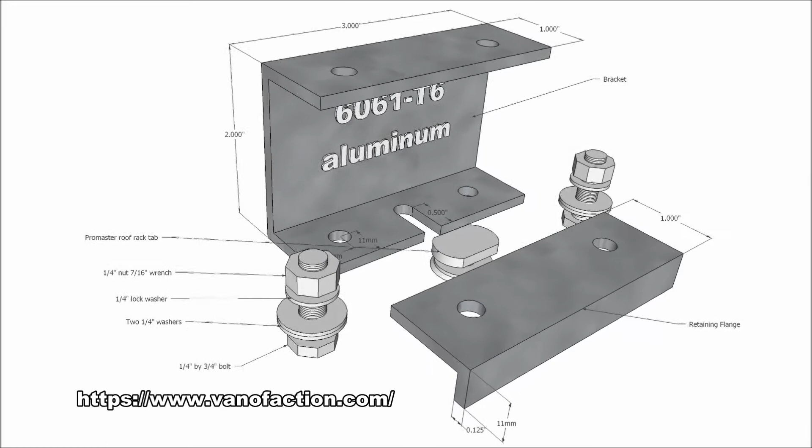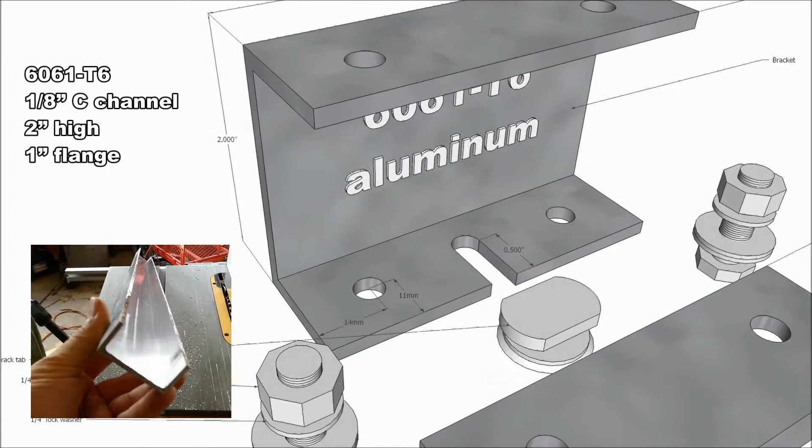Now, for starters, we need to buy some aluminum. The entire bracket can be made from a single piece of 1/8 inch C-channel, 2 inches high with 1-inch flanges. I couldn't get that exact material in Ottawa, so I bought C-channel that was 2 inches high with 2-inch flanges and then cut it to size.

The dimensions of the two finished pieces are shown here, and yes, I used both metric and standard because it seems like I'm kind of weird that way.

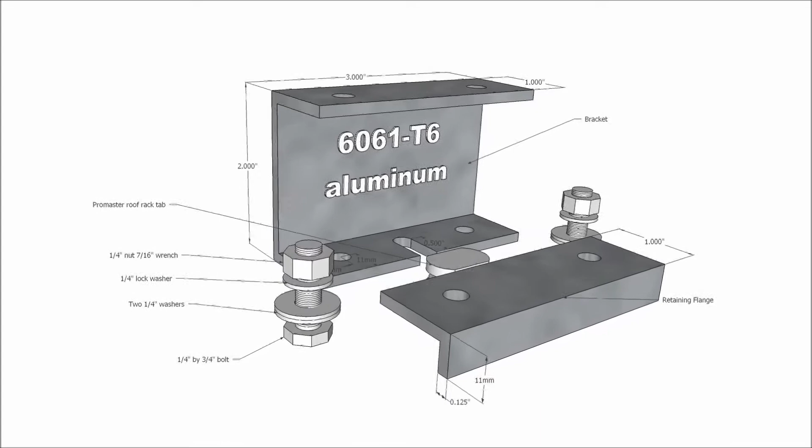Dave's design uses these two pieces to securely clamp onto the Promaster roof rack tabs. This secure method of installation requires no drilling into the roof of your van. With two 3/4 inch long 1/4 inch bolts inserted, the bracket slips under the Promaster roof tab.

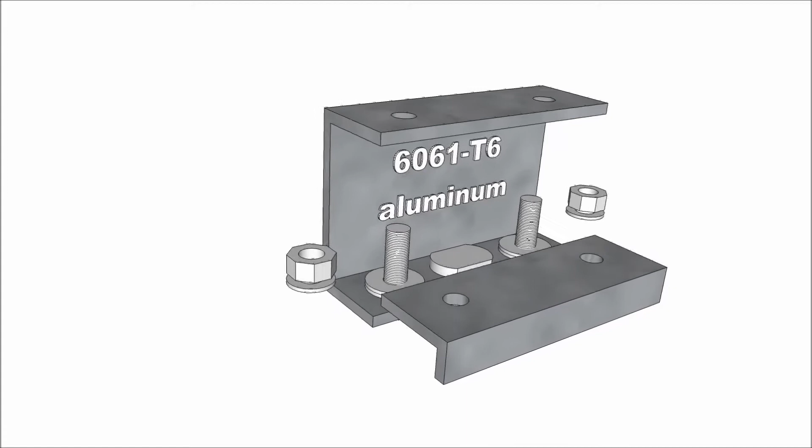Then we place 2 washers on each bolt. These are used as spacers. They are not the same thickness as the Promaster tab, slightly less, which is perfect because we want to clamp down on the tab very securely. Now we install the retaining flange, 2 lock washers, and 2 nuts. This completes the assembly.

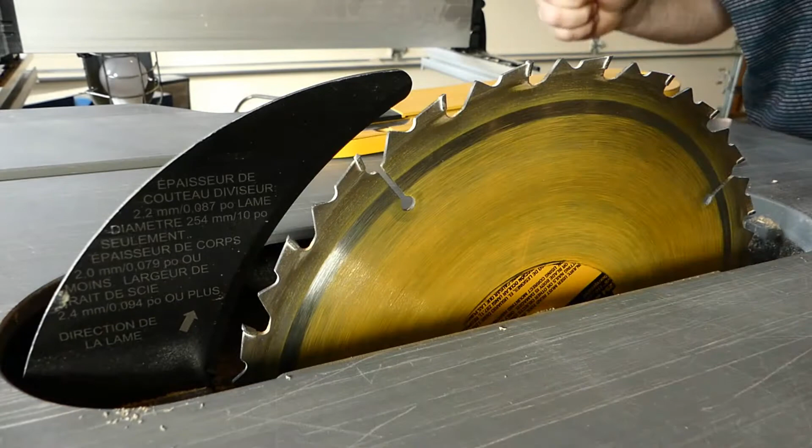I'm going to be cutting aluminum, so right from the get-go I want to swap out my carbide blade for an old one. I don't want to wreck a good blade. You may be surprised to know that you don't have to use a chop saw, a cut-off wheel, or a hacksaw to cut aluminum. You can use a table saw, a radial arm saw, or even a compound miter saw. Today, I'm planning on using my table saw.

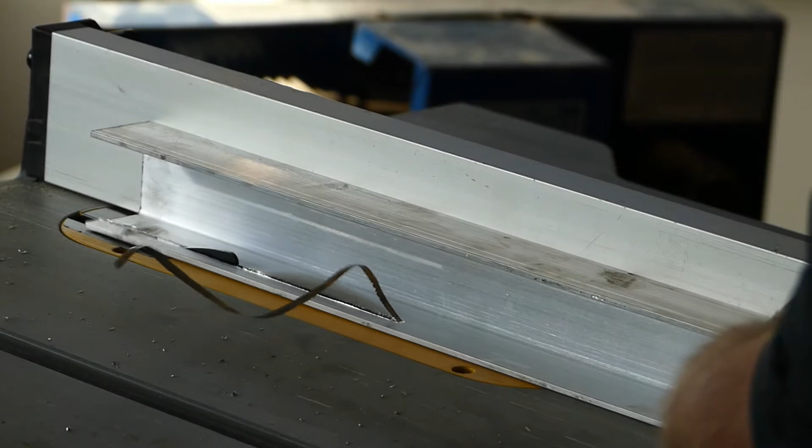Here is the 2-inch by 2-inch C-channel. Dave's plans call for a 2-inch C-channel with 1-inch flanges. I couldn't get that locally, so I'm cutting what I could get down to size. The old wood blade in the table saw makes easy work of this.

Having said that, wow, do small, sharp, flying pieces of aluminum go flying. I was wearing safety glasses, of course, but I really needed a full-faced shield. On later cuts, not on camera, I pulled out my welding helmet and cut the aluminum while wearing that.

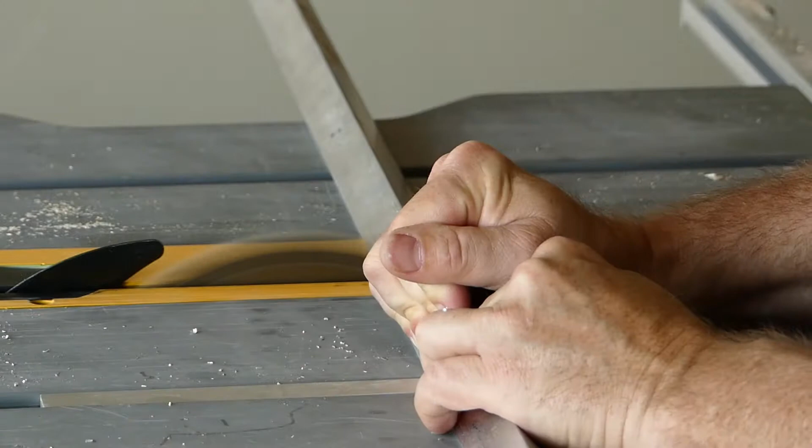Here I'm making, and will be cutting shortly, the 1-inch by 1-inch L angle to make the retaining flange. The ideal flange length ended up being about 11 millimeters.

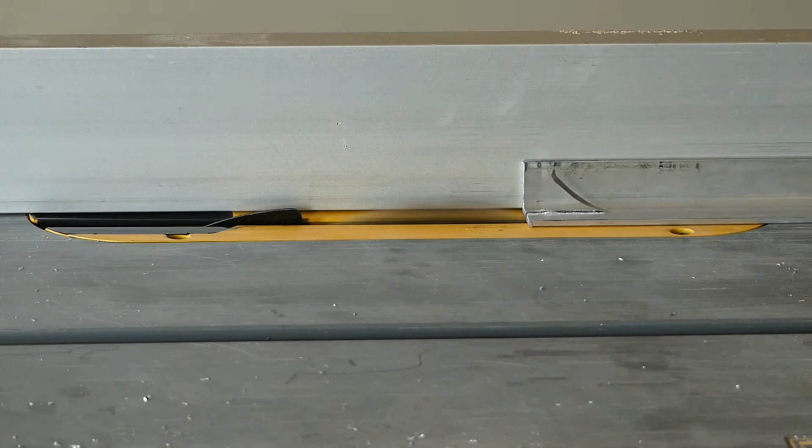Having finished the long cuts, I could have removed the blade and installed it on the radial arm saw to complete the cut-to-length cuts. Instead, I just clamped a piece of cedar to the fence to continue using the table saw to cut a dozen pieces exactly 3 inches long. This worked well and was quick and safe.

Here I'm marking the slot I need to cut out to make space for the Promaster roof rack tab.

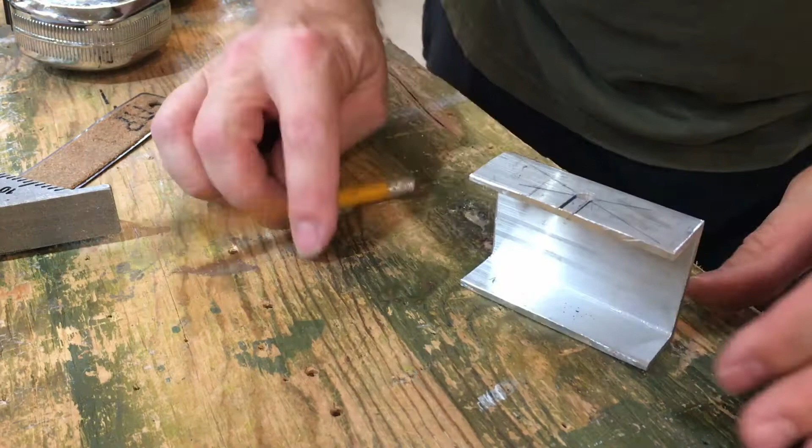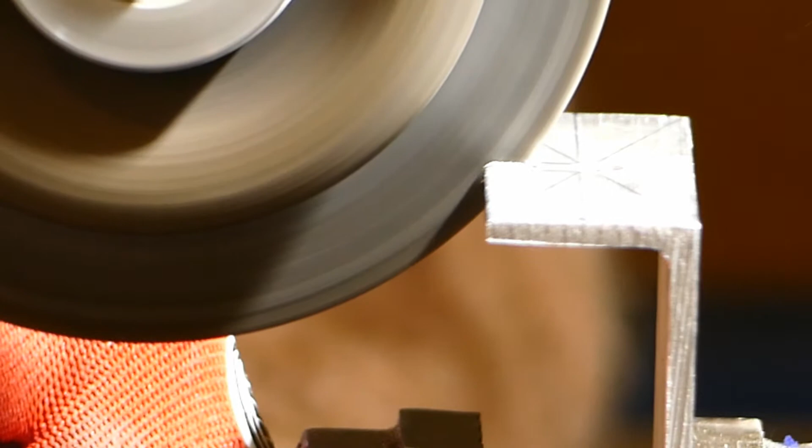Couple bolts. Oh, that's really good. And that's snug. Wow.

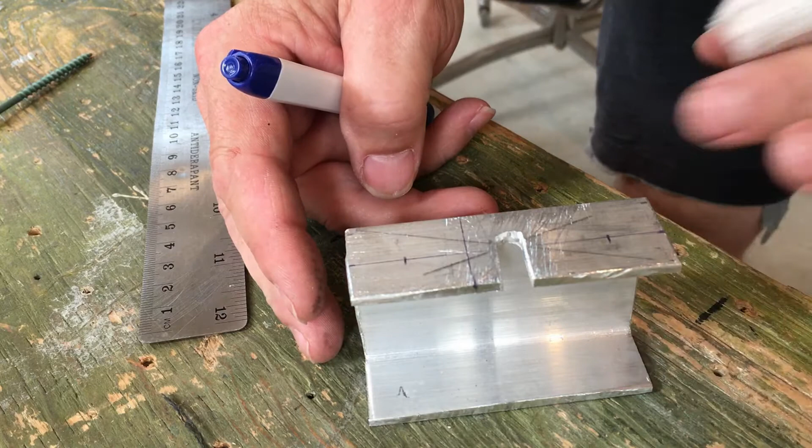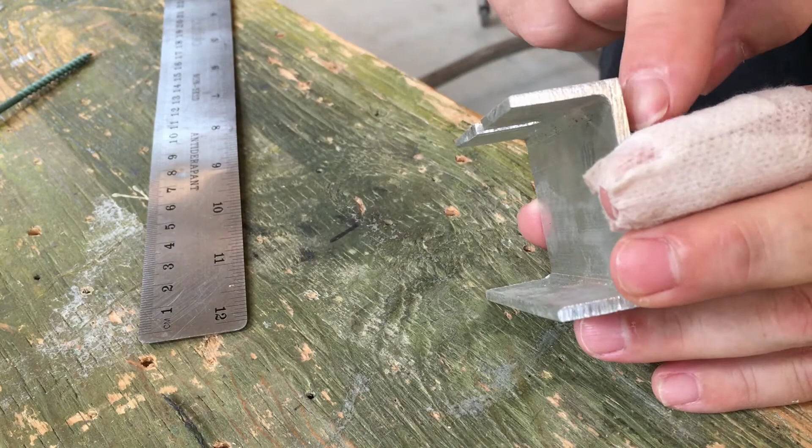Okay, I've got a couple lines here drawn on the underside, and essentially I'm not using the center of this face. I'm using the center of this face minus the 1/8 inch shoulder. If you look closely, you'll see this line going across is closer to this edge—it's actually 11 millimeters from this edge. I'm going to be consistent on all of them, 11 millimeters. And the mark here is 14 millimeters from the outside, so 11 from the front and 14 from the side. That's where I'm going to drill 2 1/4 inch holes.

So I'll use my trusty screw here and pop in just a quick little punch.

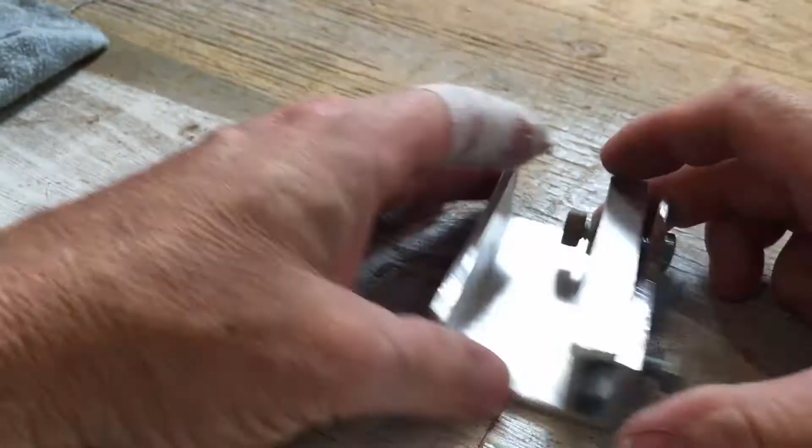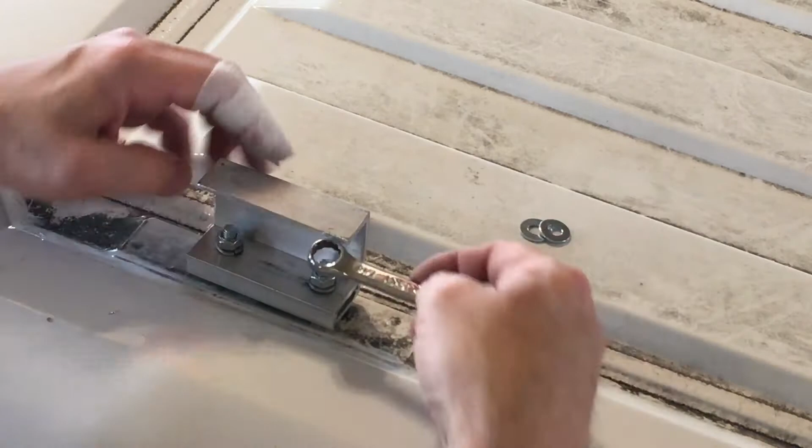So it looks like 2 washers on each side as potential spacers. Then our cover plate, the lock washers, and that is solid. Holy crow.

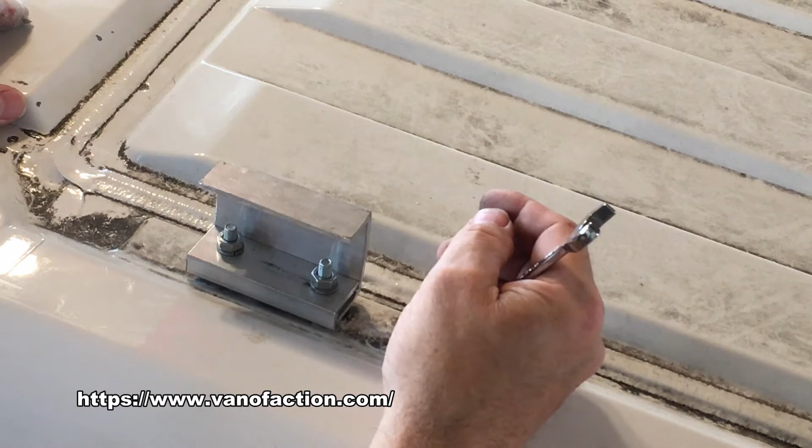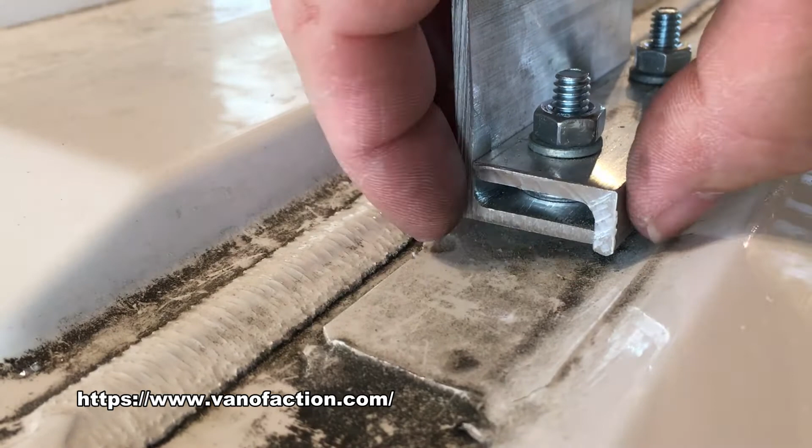Hats off to Dave from Van-o-Faction. Great job, Dave. Look here, you can see the lip is just nicely protecting it from sliding off. We got clearance down here. We have nothing touching the roof, and this is rock solid.

So we have 1 bracket made. Time to do a whole bunch of filing. 6 ready for the drill press.

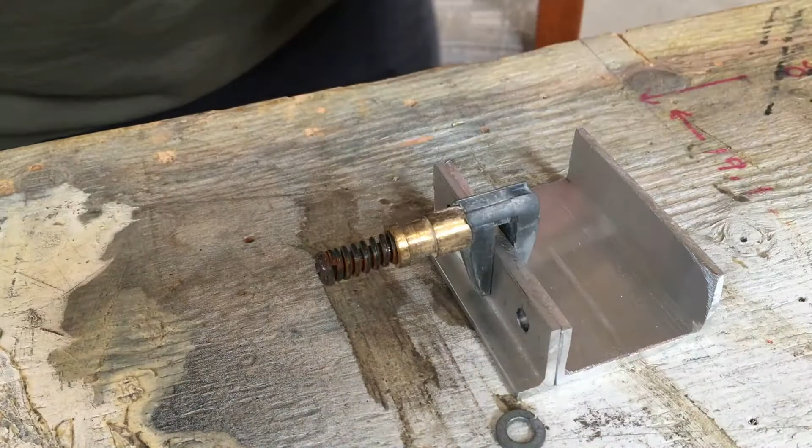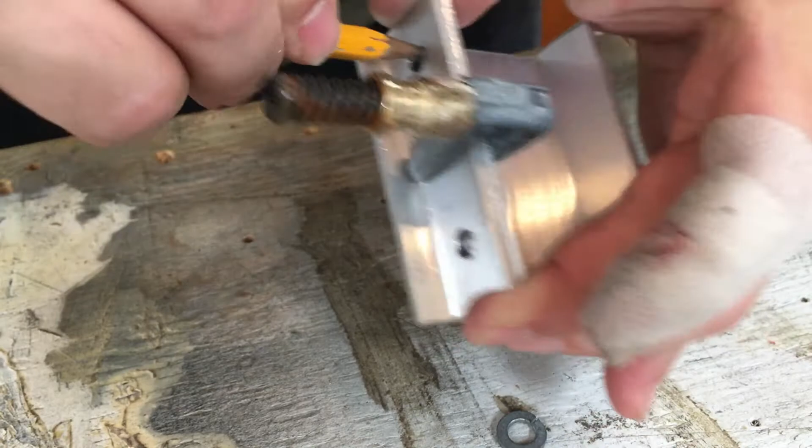Here I used a cleco clamp to hold the retaining flange up against the next bracket. I'm using the first retaining flange as a template to ensure all of the holes on all of the brackets are identical. This will ensure that all of the parts are interchangeable.

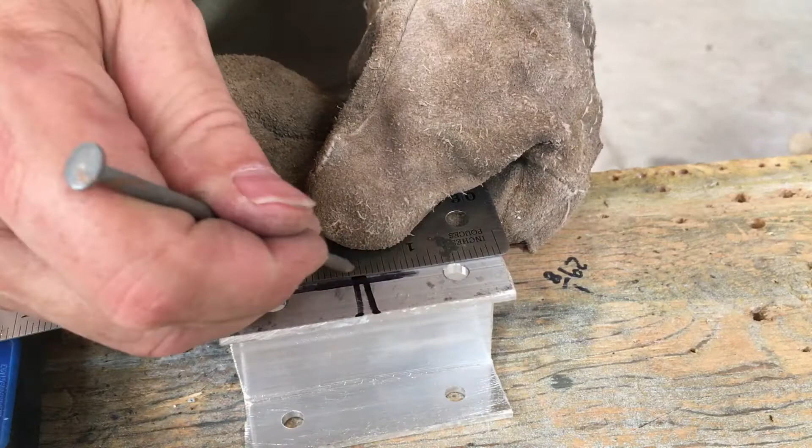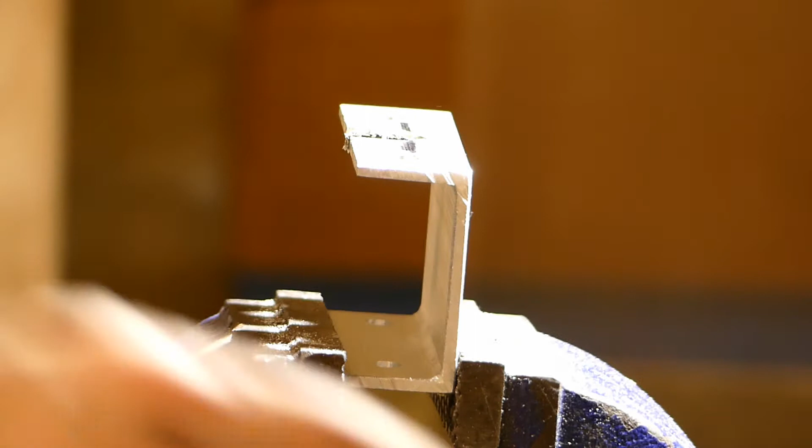Marking and punching the exact location of the hole which makes up the end of the ProMaster roof rack tab slot. Carefully cutting slots in the remaining 5 brackets. Using a 1/4 inch round file to finish the end of the slot.

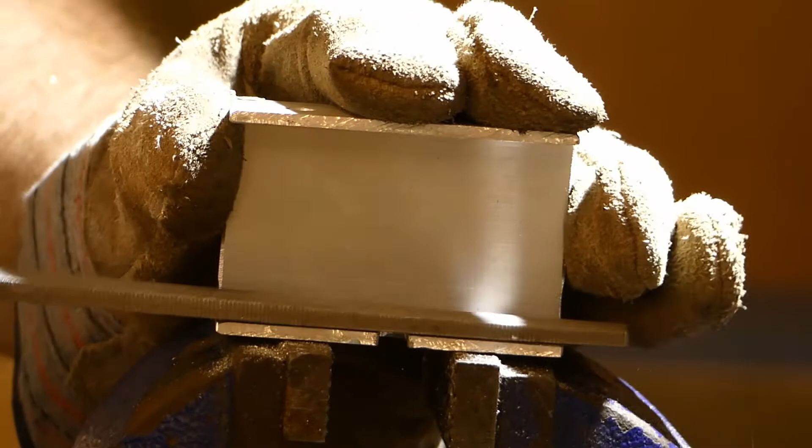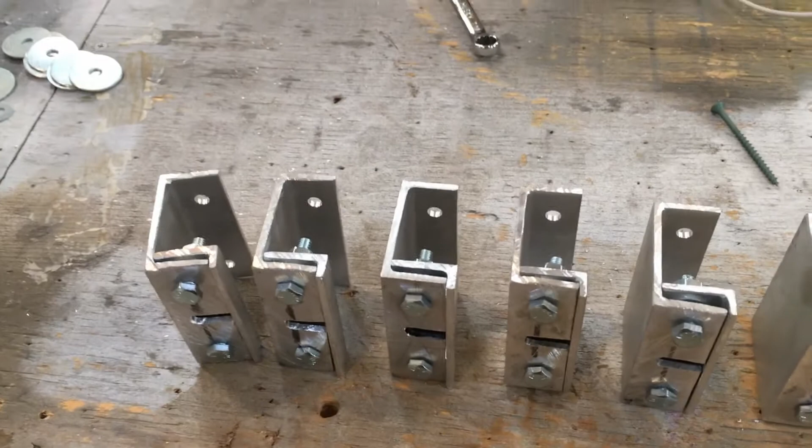Some quick assembly to make sure everything fits. Well, end of day 1, and it wasn't a full day. I have 6 finished Van-o-Faction brackets. Thank you, Dave. These are fantastic.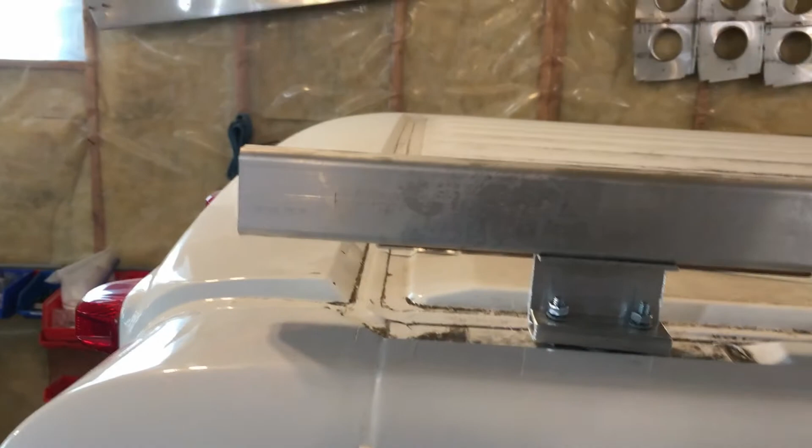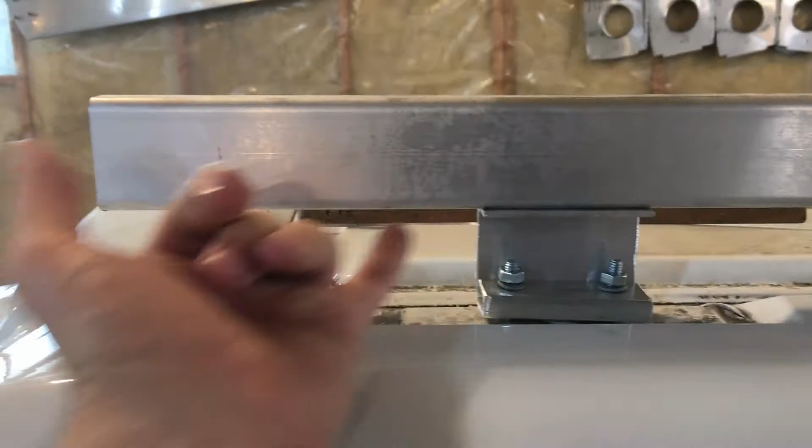Well, I've just put the 1x2 roof rack rail just on top of the first 3 brackets, and it's perfectly lined up. These are just loose right now, but what I'm doing is trying to determine exactly where I'm going to place it, then I'll mark it with a felt pen and take it back down and drill these. But I'm really impressed, the van is straight and level.

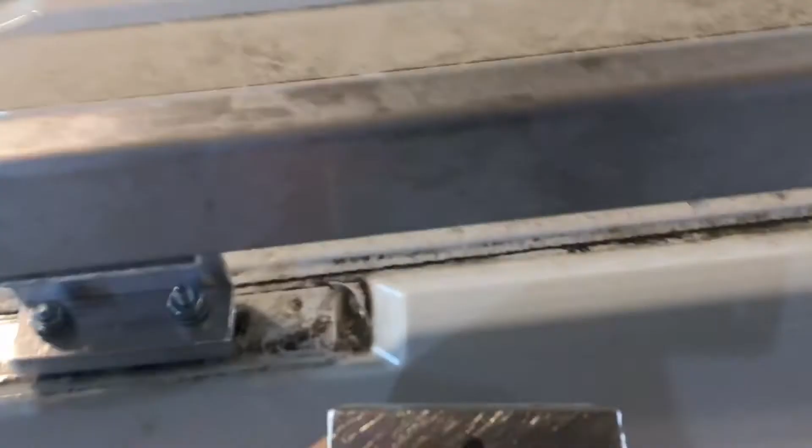I want to just point something else out. I've got a bracket here, and if you look at the back side of this, you can see that the slot in the center and the circle that it cuts into is actually further back than these 2 holes. You'll see that on my drawings. I've done that on purpose.

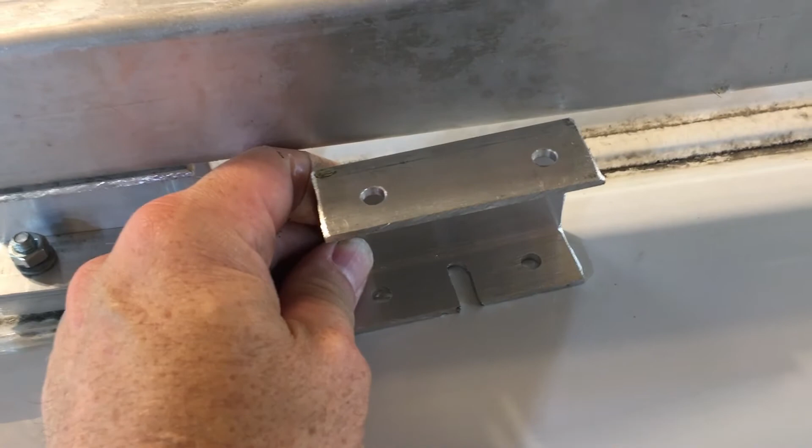The idea behind it was if I needed to adjust this, for example if the middle bar or the far one was out, I wanted a little bit of play in it, back and forth. So I allowed an extra 1/16 of an inch on each one. On the ProMaster tab, these could be here or there or move back a little bit, and all 3 positions would work well.

But I've placed them all in the middle and they're all lined up. I don't know if you'll need to drill this out further like I have, but on my van it appears to be straight from a manufacturing standpoint. So I'm literally just going to take some measurements, figure out where I'm going to put this, mark it, and then take it down and drill.

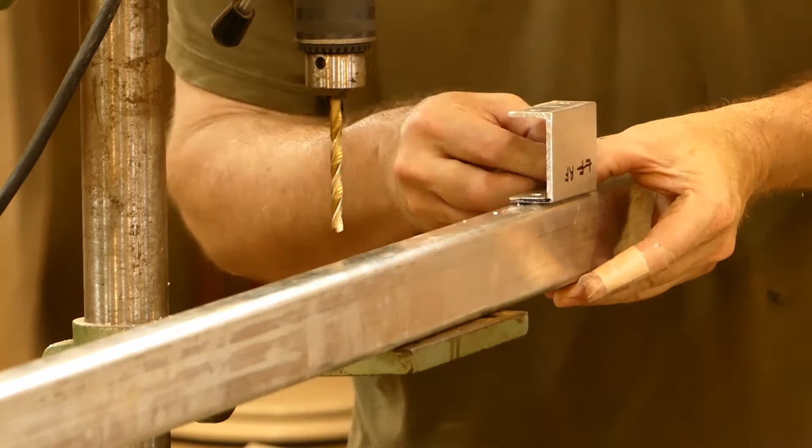Using the drill press to drill all the way through the 2-inch roof rack rails, attaching the bracket to the rail for the first time. These need to be removed before installation, but I wanted to make sure my holes lined up before I got up on top of the van, marking the center of the roof rack rail for drilling.

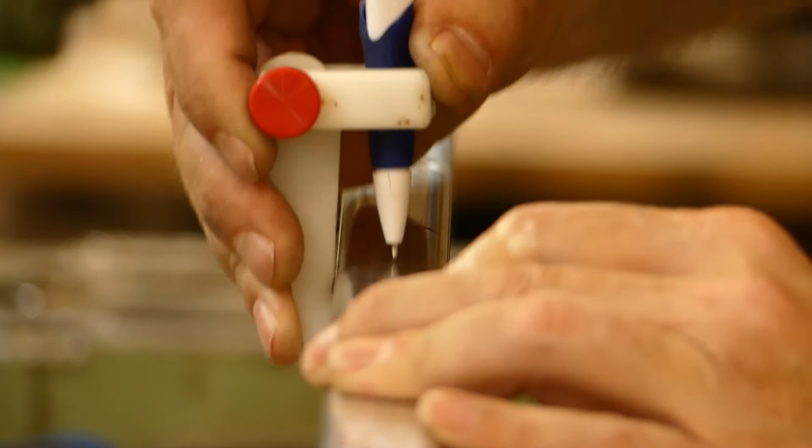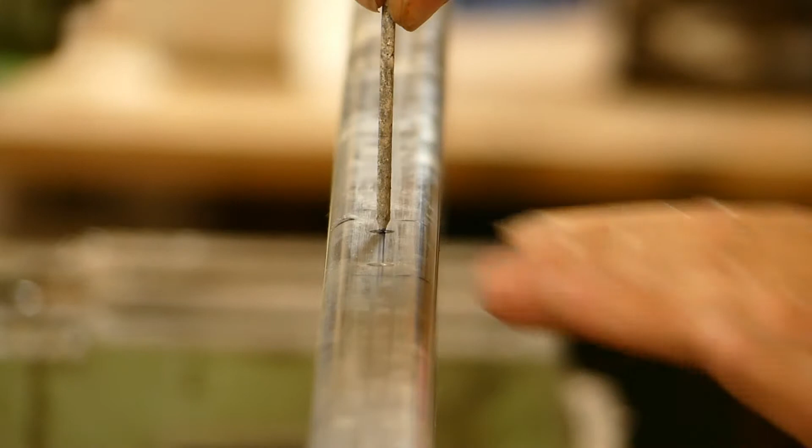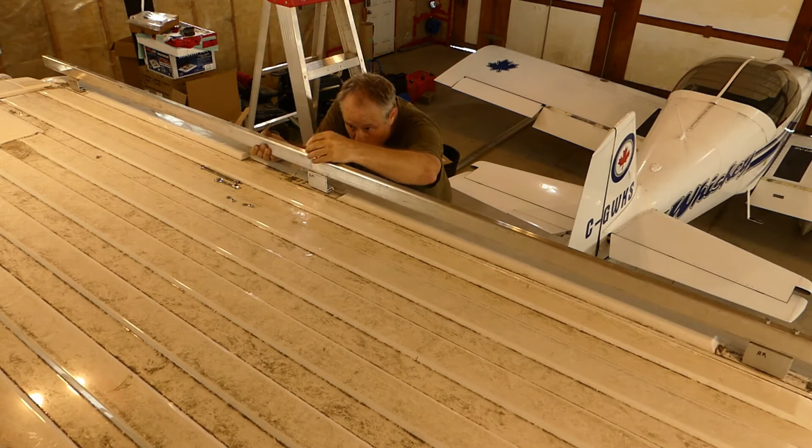Well, let's see if this fits. Awesome. That's two.

Gotta love Canada. 40 degrees below in the winter, 40 degrees above in the summer. Oh, this is hot.

One more. Oh, it's in! Oh my gosh, that is fantastic. I'm wow.

So half of the roof rack is done.

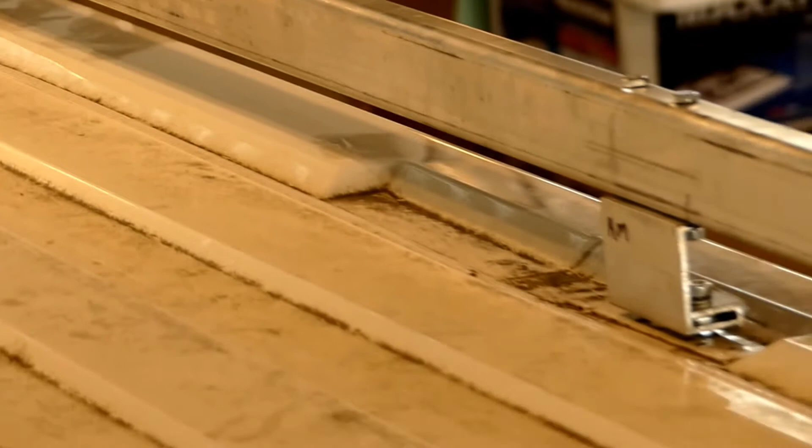After watching my video from the day before, I figured I better wash the roof of the van. Not a bad idea. One of the things I noticed while cleaning the roof was a little bit of light corrosion on the driver's side near the front roof tab. I used this as an opportunity to sand down to the bare metal and touch up this area with some trim-clad paint.

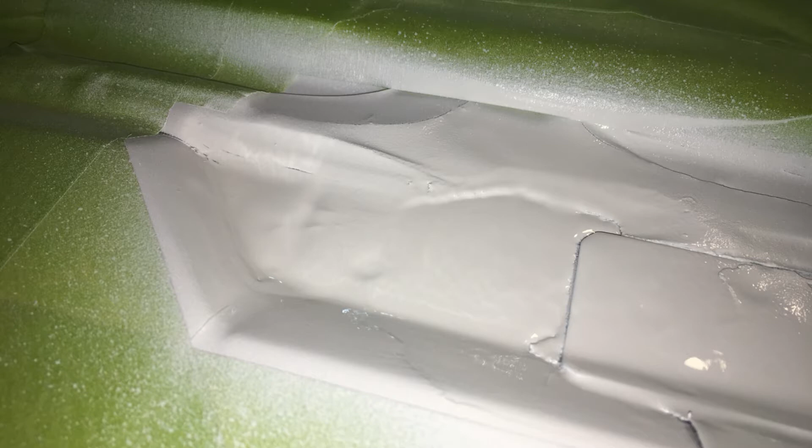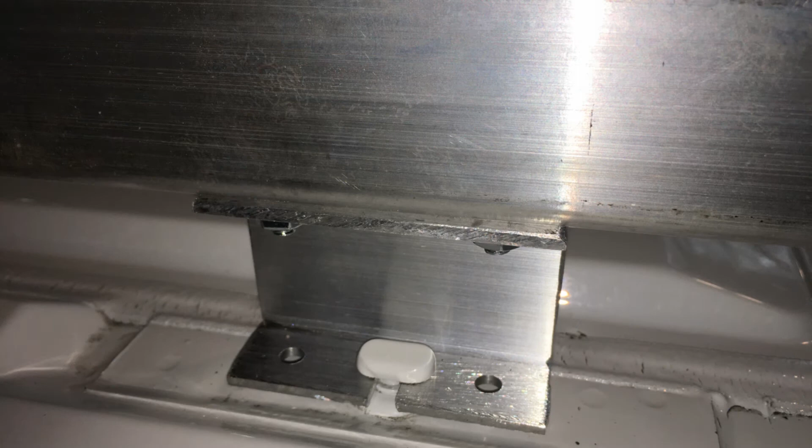Here I'm starting on the second roof rack rail. First fitting, notice the roof nice and clean. Here's a close-up of how Dave's Van of Action roof clips slide under the ProMaster tabs.

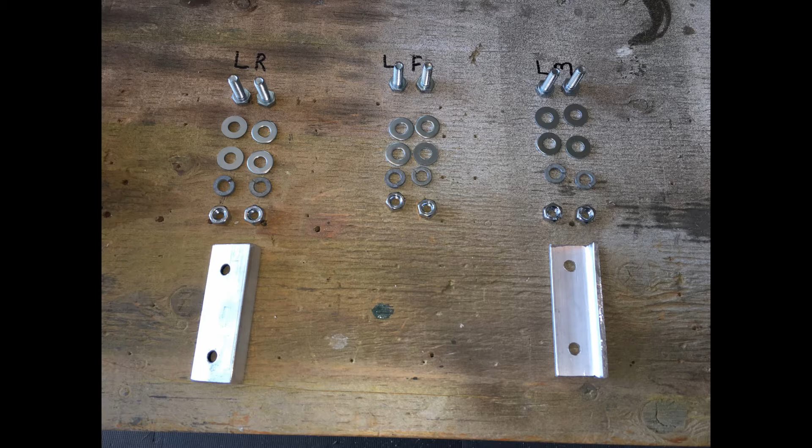Super slick. Setting up the hardware for each clip on the left side of the van. Installing the second roof rack rail.

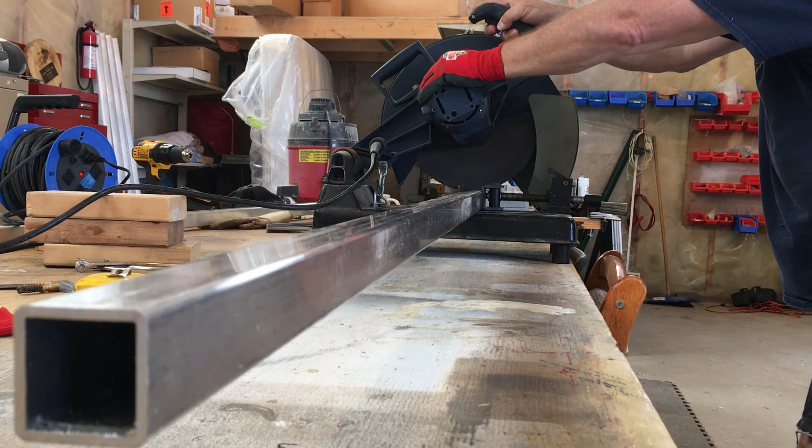Here I'm cutting a 10-foot long, 1.5-inch square tubing in half. Now these are just rough cuts. I need to cut them in half to make the material more manageable while I determine the exact length of the crossbars.

Off camera, back on the chop saw, I cut sixteen 1/8-inch thick 1-inch L angles to be used as brackets to attach the crossbars to the roof rails.

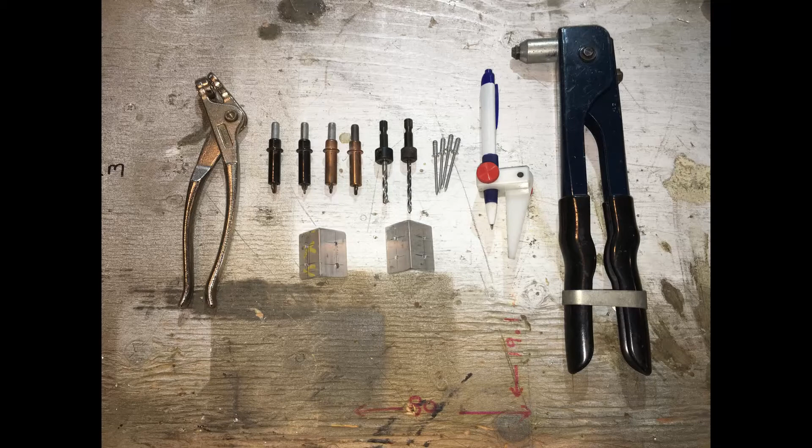Here are the basic tools I'll be using to assemble a roof rack. Not all of these are necessary, but these simple tools will greatly improve the overall quality of your assembly. I've provided links to all the tools in the description. From left to right: cleco pliers, A5 clecos, A4 clecos, number 20 drill bit, number 30 drill bit, A5 rivets, an edge marker block, and a rivet gun.

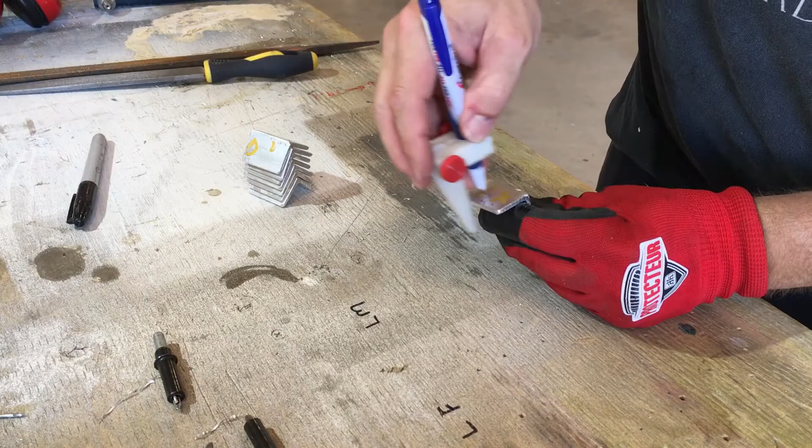Edge markers are super quick for setting up crosshairs 10 millimeters in from the edge of the aluminum. For some reason, my punch is always somewhere else.

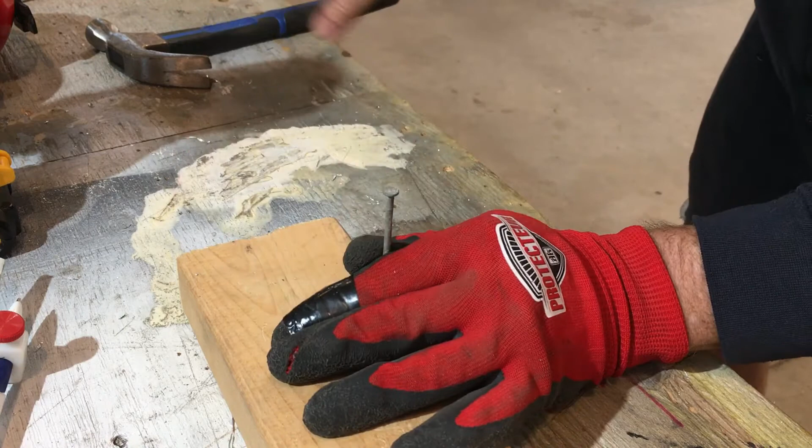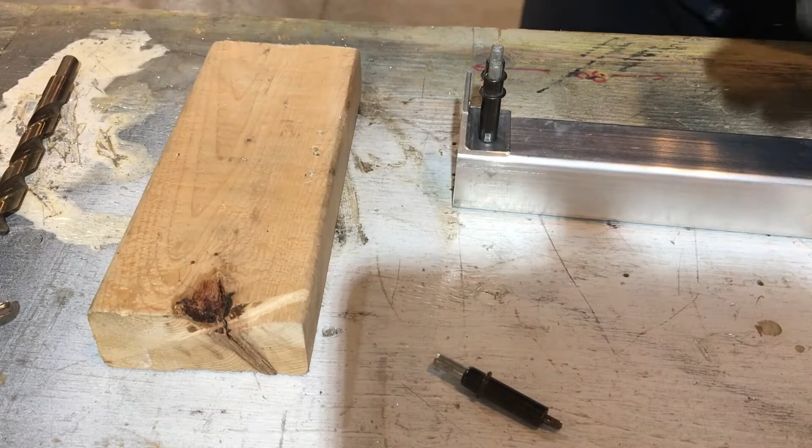First holes are drilled using the smaller number 30 drill bit, followed by an A4 cleco. We cleco the pieces together to temporarily hold the parts securely while continuing to drill. Once the pieces are aligned, we increase to the final bit size, in our case a number 20 drill bit, drilling through both pieces at the same time. This ensures the tightest tolerances and the strongest bond between the metals.

Here I've moved up to an A5 cleco. Prior to final assembly, all holes must be first deburred and then reassembled. Then you remove a single cleco and insert and pull your first rivet. This connection is extremely strong.

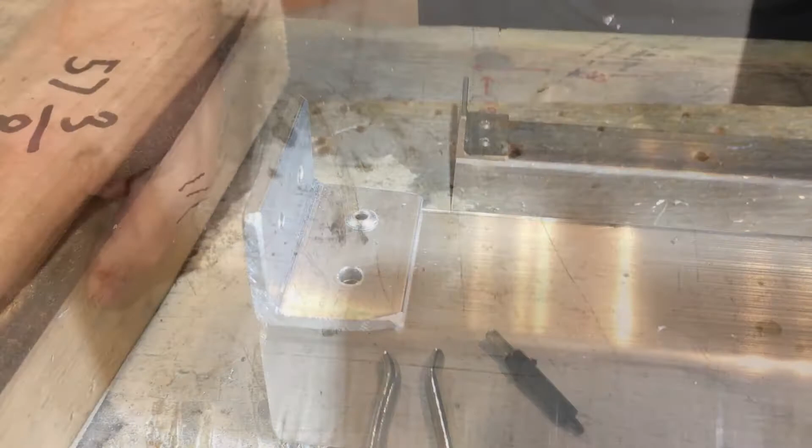Beauty. I want to take a moment here to provide a real close-up to add some additional detail. Notice the pulled rivet has a flat head and the inserted rivet is domed.

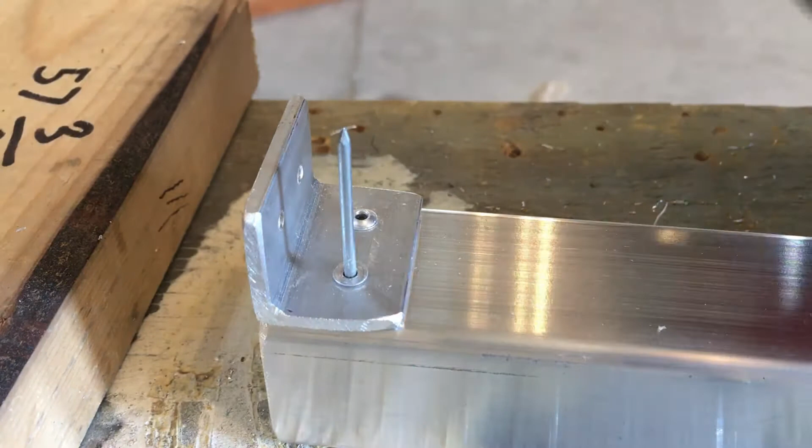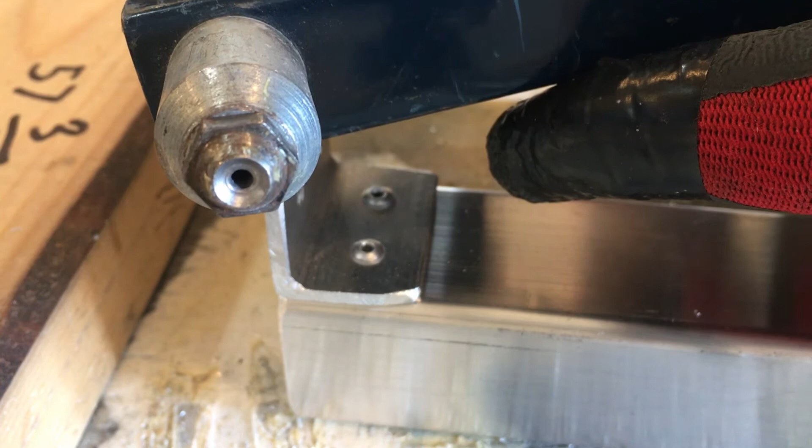Watch what happens when I pull this second rivet. The head is domed. This is not necessary, although it provides a very professional finish. I'm using a concave rivet head designed specifically to round rivets. This is commonly used in aircraft manufacturing when a flush rivet is either not possible or not desirable. Again, not needed for this application, but it does do a beautiful job pulling rivets through 6061 T6 aluminum.

Here are my 4 cross beams with brackets on one end. I'm only doing one end at this point. You'll see why in a minute.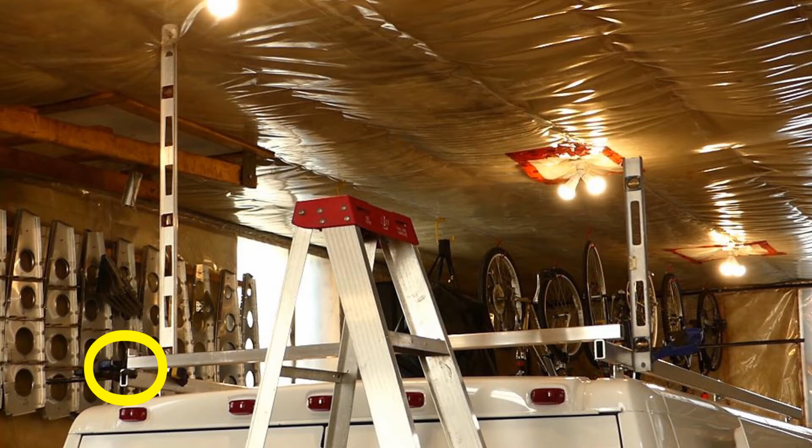Since both rails are perfectly straight and parallel to each other, all I need to do is climb the ladder and use a black Sharpie to mark the underside of the cross beam to set final length.

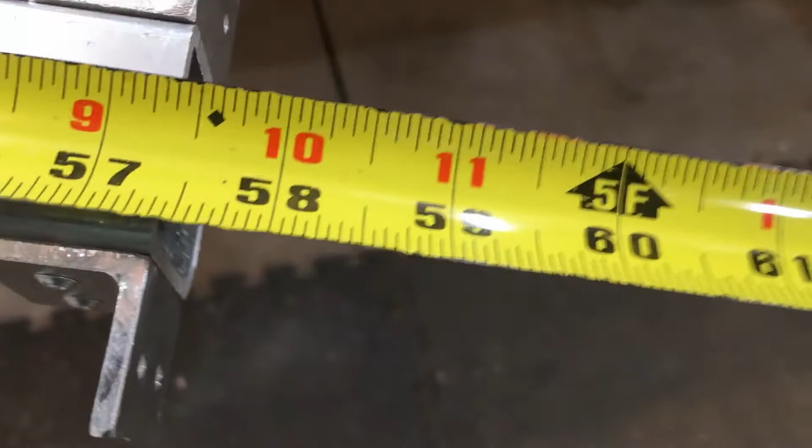Okay, so I've made my first cross beam, and it appears to be... where am I here? About 57 and looks like just shy of 3/8. No, it's bang on. 57 and 3/8, I'll call it.

Four cross beams finished with brackets installed on both ends.

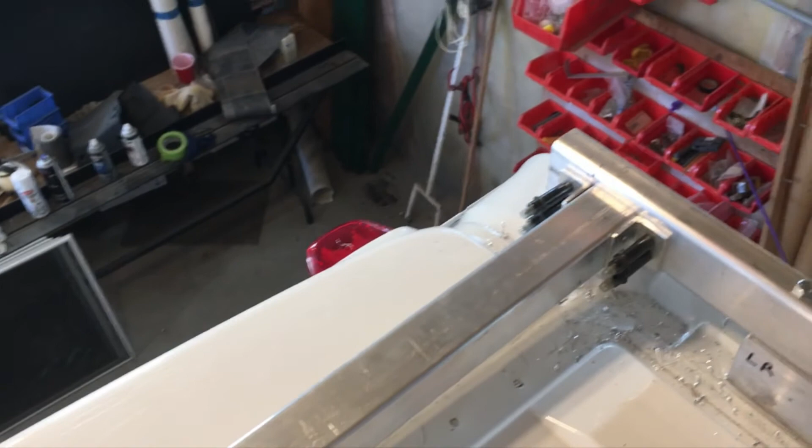So I'm up on the roof, looking at the first crossbar that I just popped in. I clamped it, drilled it, and clecoed it. I haven't riveted it yet, but holy crow, is this thing solid. I just can't believe it. This is just fantastic.

I have these drilled to final size. I'm now going to remove the whole thing, deburr all holes, cleco it all up together again, and then remove one cleco and start riveting.

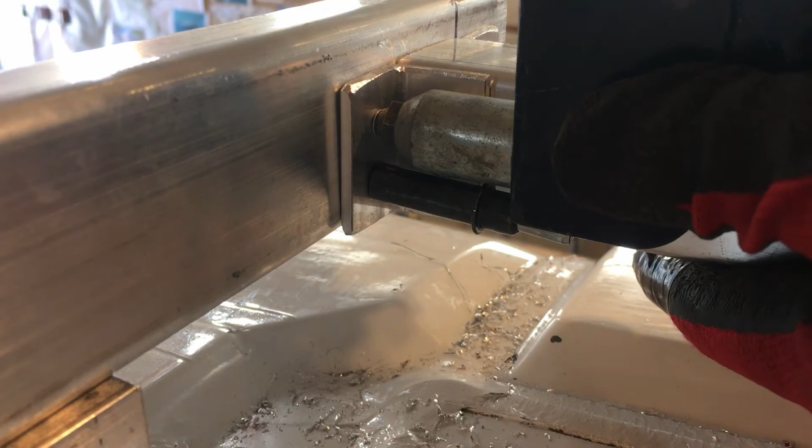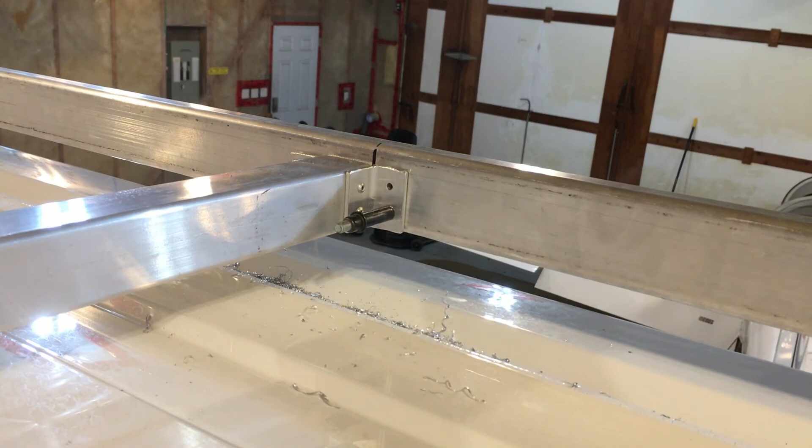Here I'm using a flexible drill bit extender. With 1-inch flanges, we're working with tight tolerances, and I want to ensure that the final hole is perpendicular to the work surface.

With the fourth cross beam installed, our roof rack has now been fabricated and assembled. Man, does this look good.

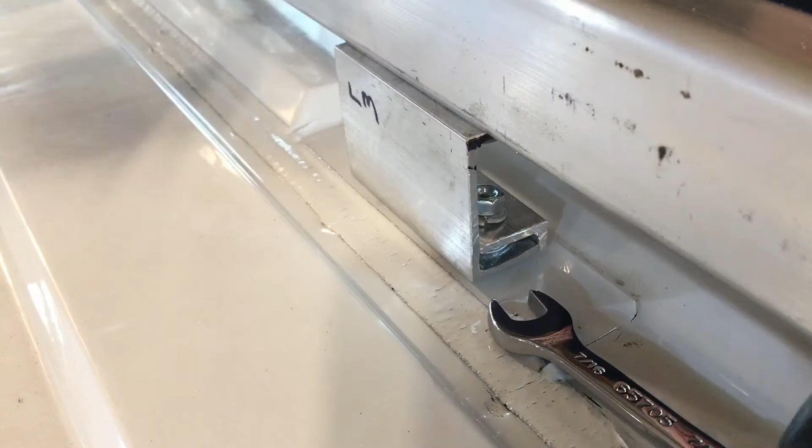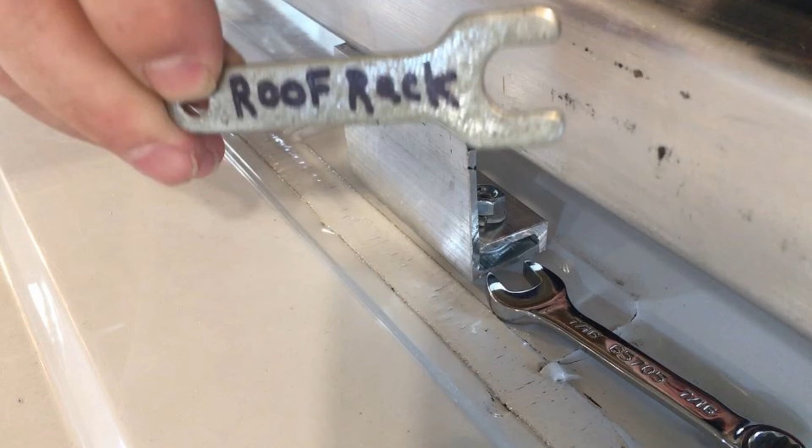Next, we will tighten the Vanaction roof clips to the Promaster tabs. To do this, I need to grind down, i.e. reduce the profile of a 7/16 wrench. Well, look what I found in my junk pile of old tools. A wrench. It probably came with a kit of some sort a few decades back. It's not exactly the right size, but it works, so I've labeled it and added it to our van's permanent toolkit.

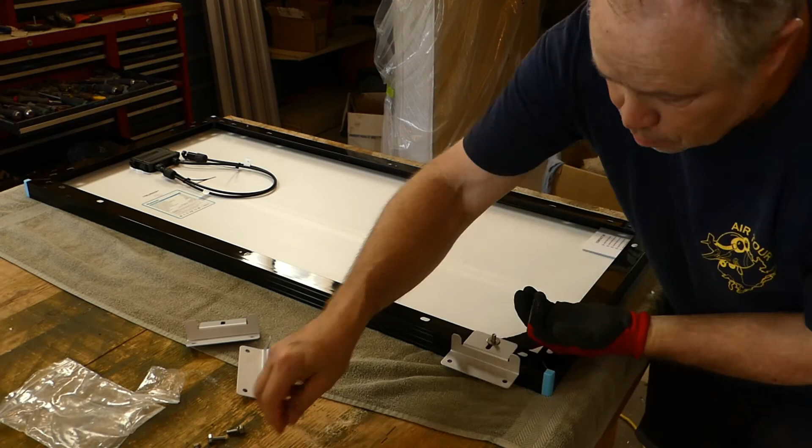Here I'm assembling the brackets to the solar panel and sliding the units into place.

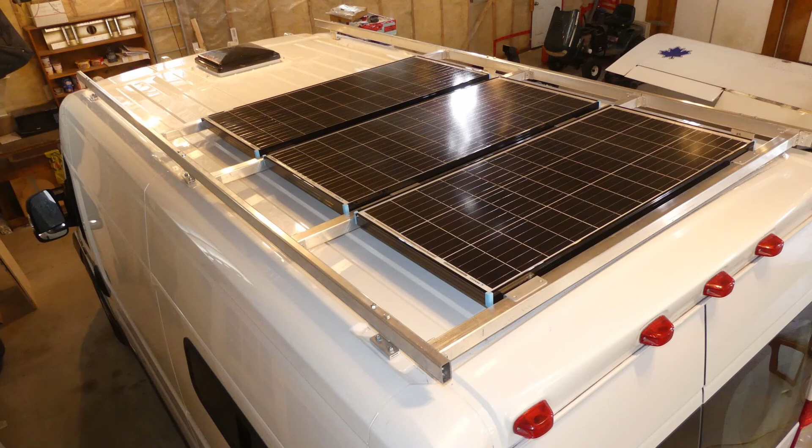This was a fantastic project, very rewarding, and it came in at a quarter of the cost of buying a commercial unit. The entire unit, aluminum, brackets, bolts, washers, and rivets, came in right around 350 Canadian. Pretty hard to beat that.